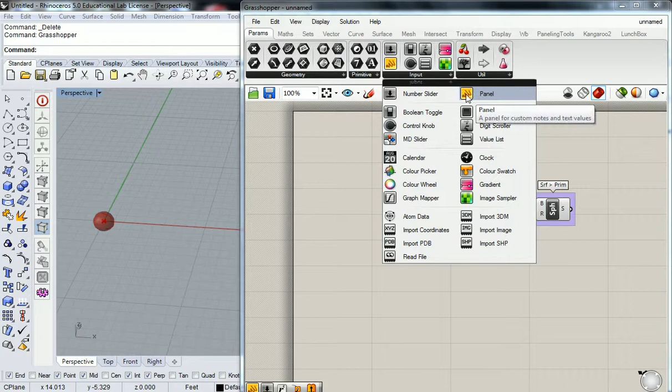You'll see that it's kind of silly that I'm doing this, but I just want to show you that there are two different types. So with panel, right here under params, under the input panel, there's a component called panel. This one comes through as like this giant yellow block. This one is a little bit different.

What I kind of want to show you is that a panel can be used in two different ways. You can use it to manually input information and then feed it into something, or you can use it to read information. So if I double click it like this and I type in 1, I can take that 1 and plug it into X, and you see that it moved over a value of 1.

That's the simple form. But that panel, if I Control Z all the way back to its original place, can also read the information as well. So if I take the sphere output and I plug it into the panel, it now reads like this. It reads as, says 0 next to it.

I'll explain that in a bit. But then it says untrimmed surface. So that's important because at certain points, you're going to want to be able to readily see the information that is being processed. The information also exists right here. So if I hover over the output, it tells me that information right here. But it's not just going to stay there unless I put a panel on it.

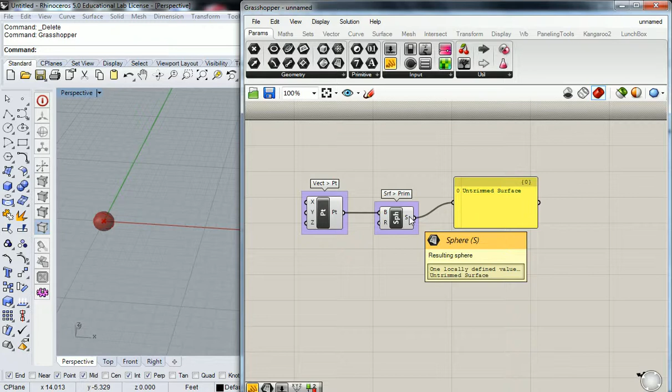Okay, so the reason that we have that is because this, for us, is a very versatile tool, and I'll use it a lot. So we'll get used to a couple of the different settings for it. But right now, we're just going to use it as a static number.

For me, what I like to do when I'm doing a static number is to just make it really small like this. You can make it different sizes, but I just pull it all the way up to make it really small like that, and I'll put in a number like 0. Hit enter. It should look like this, and if you plug it in, it won't change anything because the default value is 0 anyway.

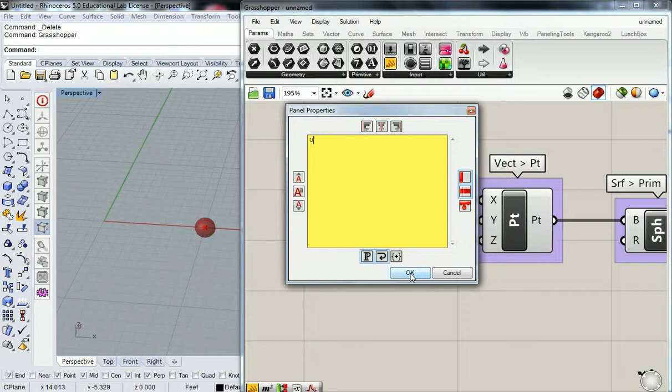Now if I wanted to move it, I could change it to 10 and it'll move over. Just double click it to change the number. So it's going to look silly because I'm going to make all three of these a value of 0, but I'll show you the change later on. So anyway,

If we want all three values to be the same thing, you can plug in using the same output. You can use the same input into 3 separate values. So this 0 can also be plugged into the Y and the Z. Then at the same time, I can change the X, Y, and Z all at the same time by going to this and changing it to, say, a 5, and then it moves over there. But like I said, I'm going to go back to 0.

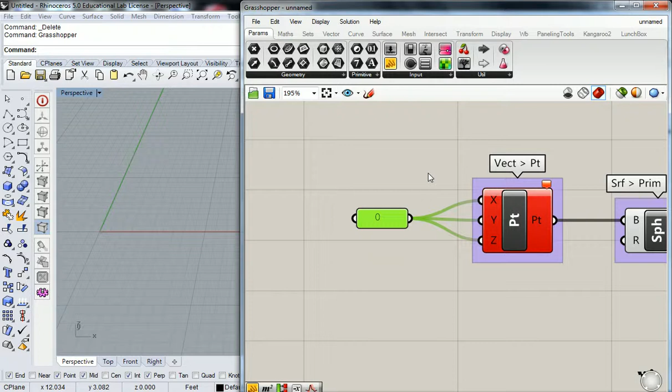So before I ask for questions, I think a number of you may have run into this issue where if you hit enter and hit OK, it'll give you an error. Yeah, a number of you saw that, didn't you? That's because this is the one instance where syntax, like programming syntax, like computer code, actually does matter.

The reason is when you hit enter from 0 down to the other line, another line, it switches from reading a singular numerical data input to multi-line text. And when it reads as multi-line text, that 0 is no longer an integer 0, it's a string 0. When it reads as a string in computer programming language, it's not a number. It's just the alphanumeric representation of 0.

That might be really confusing to you. I might have really thrown you off. But basically, think of numbers and text as two separate families. You can type out the number 0 using letters. So when you change a number 0 to a string, it's as if it's reading it with letters.

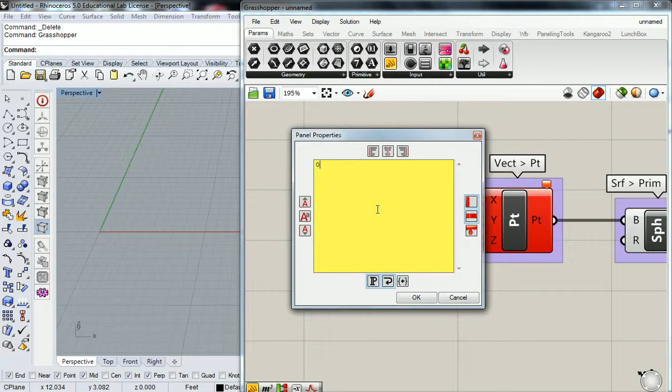Is that better? Okay, so you need to make sure that it's a single line numerical data input when you're doing this, and just don't hit enter, or it will give you the error.

All right, so that's just the placement of the sphere. The other part is we need to set up a radius for the sphere. That part's much easier now. You know how to do a static number, you know how to do a dynamic number, dynamic meaning I can change it. So I'm going to input a number slider for the radius.

But what I want to avoid is, every time I need a number slider, because we need them a whole lot, I want to avoid having to place it in the workspace, then double click it, then double click the number, change the number, click the green check, and hit OK every time I want to set the parameters of that slider.

So there's a shortcut I must give you right up front here today, and that's to double click in the workspace. You can use the search feature that's there to shortcut to a number slider using syntax. If I double click in the workspace, it says enter a search keyword. If I type in something like slide or slider, you'll see a whole bunch of these things show up, and you can select from those. That's a search feature.

You can click the number slider and drop it in, and that's just going to give you the same thing that we had before. But then I still have to go through all that stuff and establish all the parameters for it. I don't want to do that, so I get rid of that.

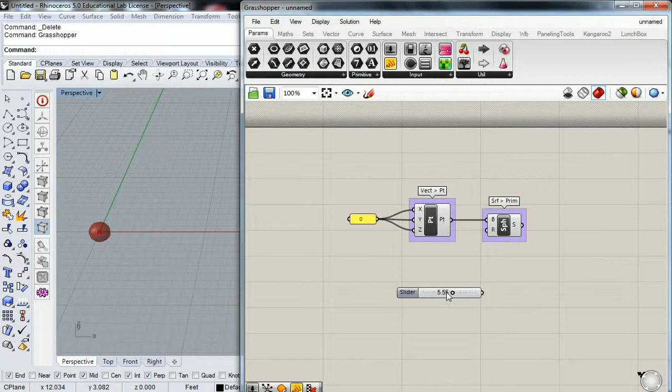So anyway, if you want to use decimals, or if you want a different accuracy for it, you can type in your numbers here with one of those values having decimals. So 5.55, for instance, if I start off at 5.55, then I'm going to have 2 decimal places for my slider. So 0 is less than 5.55 is less than 10. Now my slider is 2 decimal places, so it's a lot smoother.

So to complete this sphere now, I can plug that into the R. You see it got much bigger. So now if I slide back and forth, you see that it actually will get smaller and larger as I change it.

What questions do you have? How did you get that dialog box to type in 1/5?

Double click in the workspace, yeah, it's a search. Any other questions? So I just type 1/5 and it'll come up with a slider? That'll make a slider from 1 to 5. So basically, when you're typing it in, you have to tell it what your minimum value is, what your starting value is, and what your ending or maximum value is. So 1 is less than 5 is less than 10, or whatever you want to change it to.

Yes? To get the decimal, can you also put 0.00? I think so, so 0.00 is less than 10 should also produce 2 decimal points.